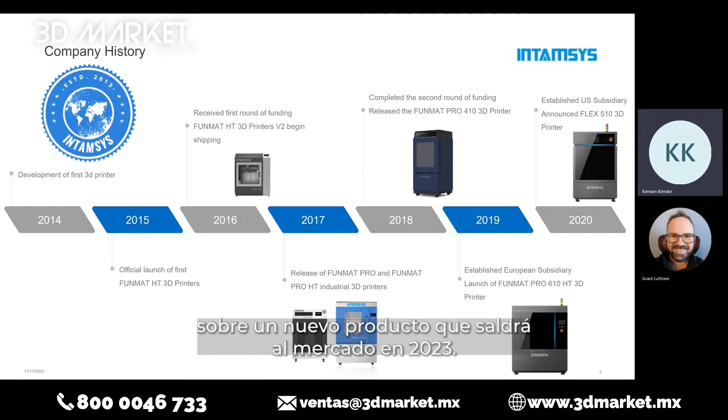When we look at not only the logos, but really the industries that we represent, we really have a focus within aerospace defense, automotive, general manufacturing, and the education market. It really comes down to the array of materials. As we mentioned, we focus not only on engineering grade, but getting into some of the high performing materials allows for applications into several of these industries.

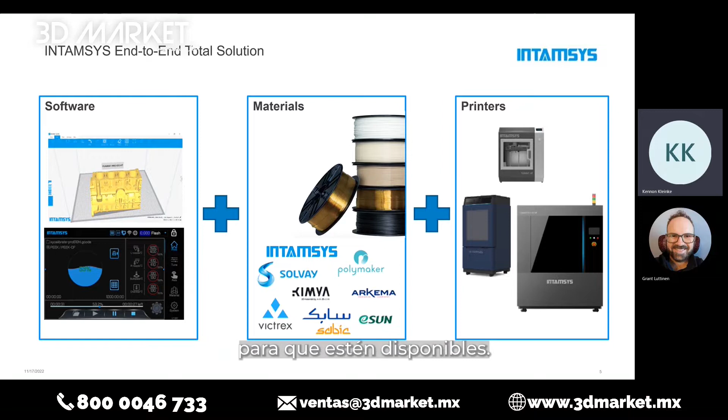When we look at the INTAMSYS capabilities, the technology, and the software that drives everything, it's important to represent that we are an open material and open software platform. We work with several material manufacturers to not only create or define some of our core materials, but that's a continuous development, and we work with these partners to introduce new market materials. When we look at the software, we do have INTAMSYS driven software, which we define as INTAMSuite. This is really an open source, ease of use software that allows your team to have complete control of the parameters needed to drive your application.

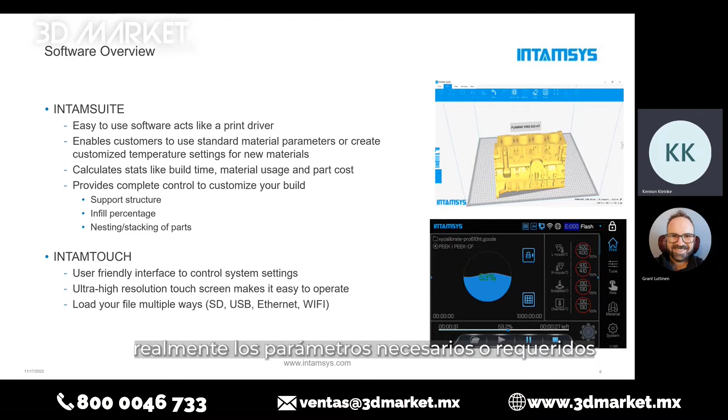When we look at some of the material manufacturers, we partner with some of the top quality filament manufacturers on the market. We have validated and have an INTAMSYS brand of materials that we supply. But if there's third-party or other material options you're looking for specific to your application, being an open source or open material platform, we give you full control to go to the market and find the best material for your application.

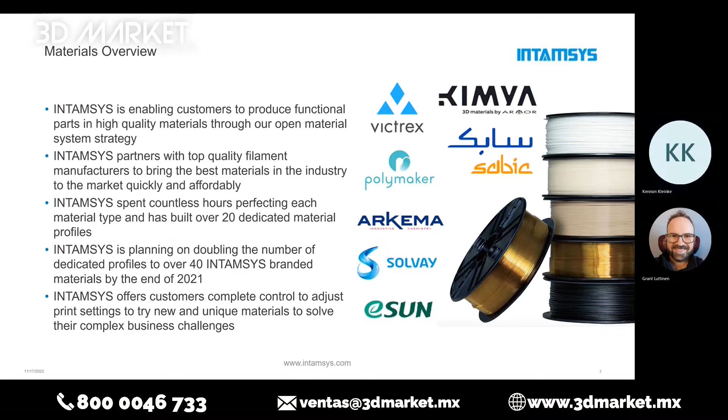Here's a look at the overall product line of where we are today. We started with the FunMat HT. We got into an intermediate industrial level, and then at the larger scale we go to a full industrial unit. We'll get into some specs and details here today in terms of the visual specs. In a little bit, Grant will give a detailed overview as we do a tour of our additive lab, and we'll get into more details inside the technology so you get a closer look.

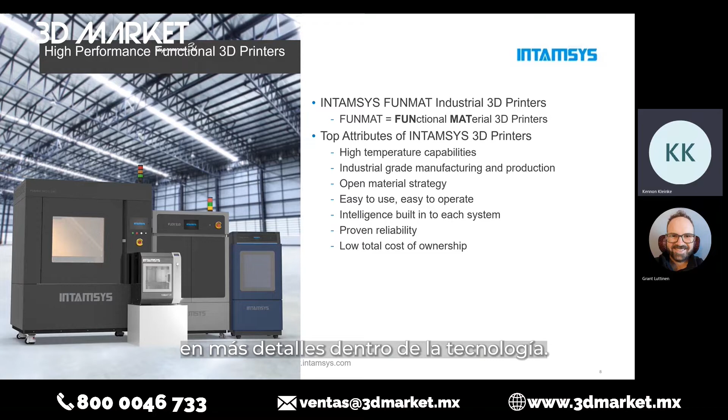When we start with the FunMat HT, we look at our desktop level. This is an industrial desktop printer. As you'll see with the chamber capabilities of up to 90 Celsius, that gives us the capabilities to start working into the high performing materials. As you will see, we have the capabilities of doing PEEK, PEKK, as well as some of the carbon-filled, glass-filled PEEKs and additional materials.

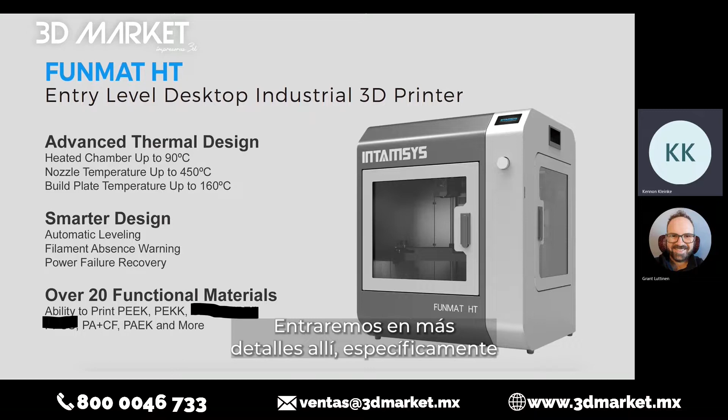We do have some of the materials crossed out. We were attempting, or at one point we were running Ultem, but we really look at that full industrial 610 unit for that. We'll get into more details there specifically to the Ultem material portfolio.

This goes into just some of the more basic information regarding that FunMat HT. We will have these documents available for PDF within this webinar download, so look to the sidebar for that information and you can obtain each of these documents for the FunMat HT, the 410, as well as the 610.

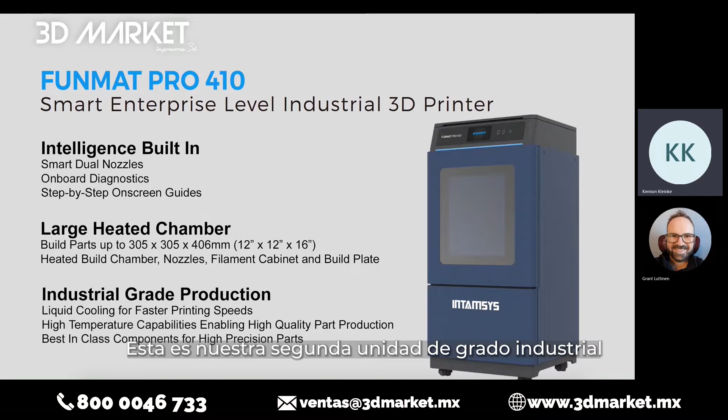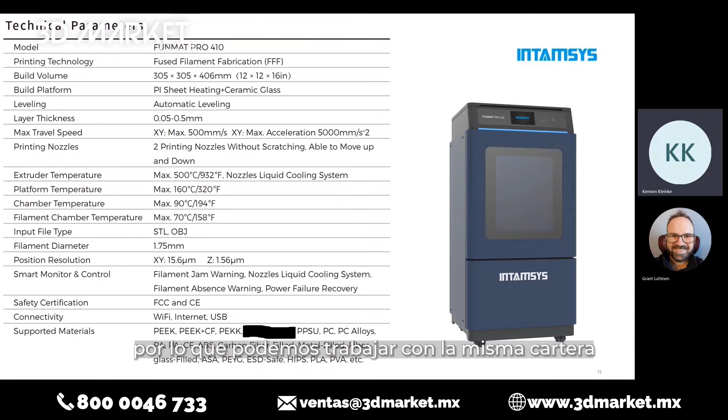This is our second, really our lower level industrial grade unit. This is a dual extruding printer, so that gives you the ability to work with that main filament as well as a secondary support material. You have a little bit larger build volume with this, an included material chamber, and we'll get into more details on the capabilities with the 410 machine. Again, this is up to a 90 C chamber temperature, so we can work with the same material portfolio as the FunMat HT, but we also have the availability to bring in support material, or work with a dual material application if required.

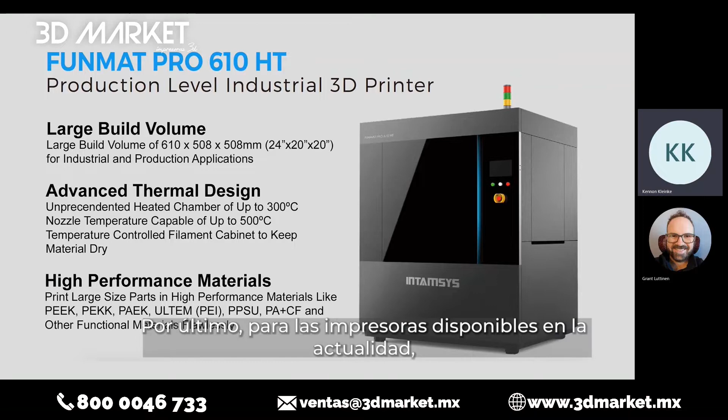Lastly, for the available printers today, we have the FunMat Pro 610. This is a full industrial grade unit.

Not only will it do the engineering grade materials, the high performing materials like PEEK, but as mentioned, we can do ULTEM 9085 as well as ULTEM 1010 and PPSU materials.

This is a much larger unit in terms of not only the build volume, but the size of the machine, and the capabilities of the machine.

Really with the ULTEM and the PPSU materials, as you'll see, this machine has an up to 300 C chamber environment. This allows the application to print not only the materials of ULTEM, but with the build volume and scale, we can do a 24 by 20 by 20 application.

So this gives you not only the ability to look at some of the highest grade engineering materials, but we can really do things on a larger scale as well.

So that's going to finalize a basic coverage of the technology and INTAMSYS. I think what we'll do now is get into a tour of our facility and give you a live look at what we have available, a better look at the machines, and give you a closer understanding. If you have questions, use the chat. We'll address questions throughout this, or maybe at the end as we take questions in as well.

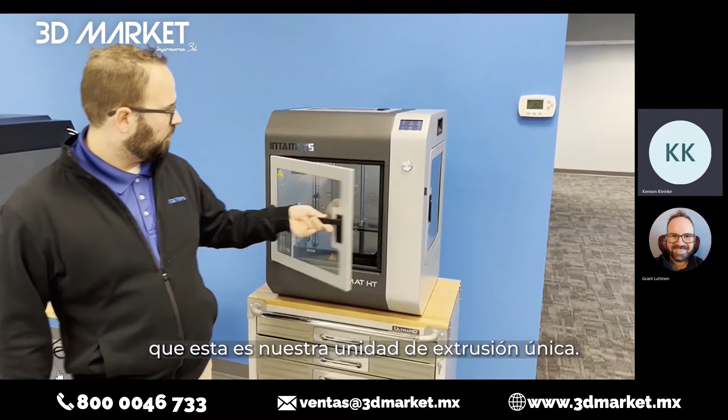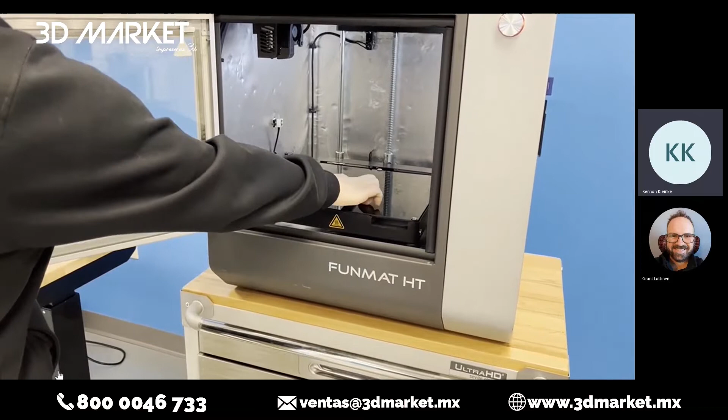So first here, you'll see our FunMat HT. Like Ken was saying, this is our single extruder unit. It features a ceramic glass build plate, 10 by 10 by 10 build volume. You'll see the heated build chamber with dual heaters and fans there.

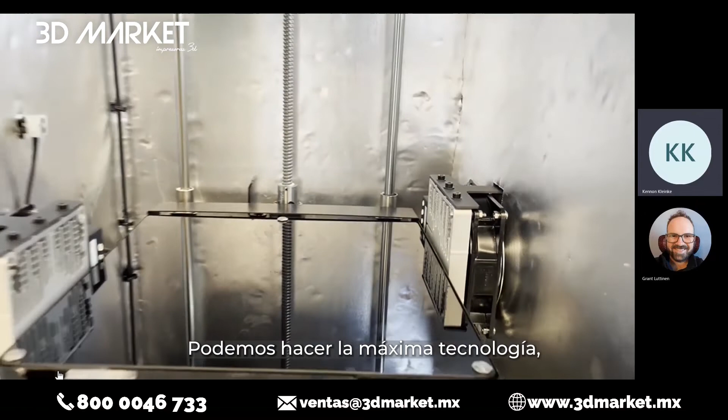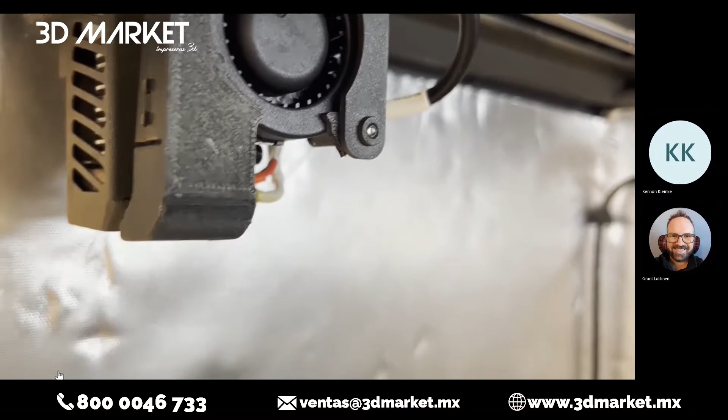Here's a quick look at our extruder, high power cooling fans, well insulated design. And for an entry level unit, getting access to these high performance materials, this is kind of second to none entry level.

Moving on, we'll go to a sneak peek of our Pro 310. This is our new desktop launching Q2 2023.

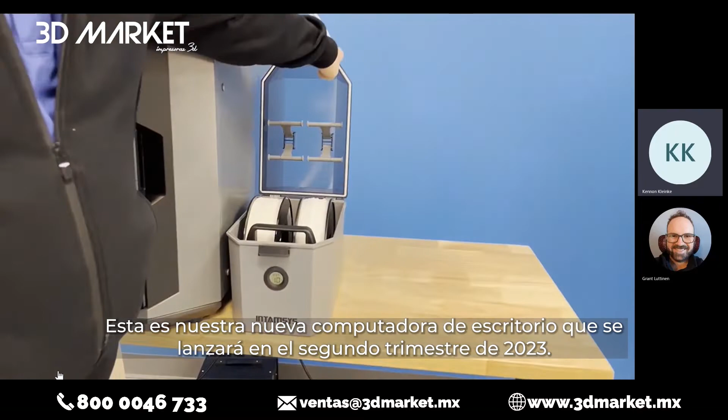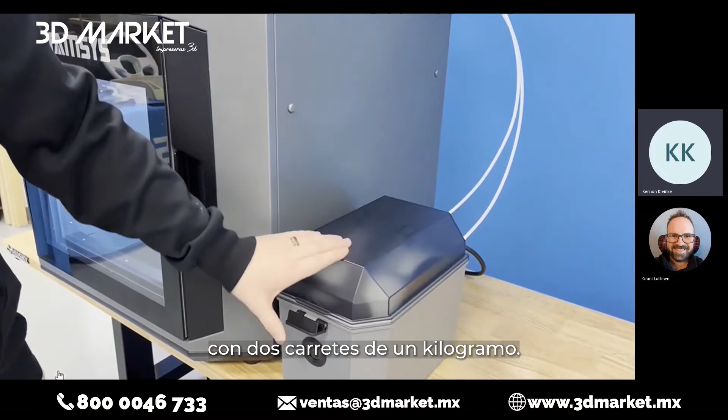Here we have a filament chamber with a molecular sieve. This is a desiccant filled chamber that holds two 1 kilogram spools. This keeps your material dry for up to 2 weeks.

In the chamber here, you'll see we have a flexible build plate. This allows for large parts to be removed very easily.

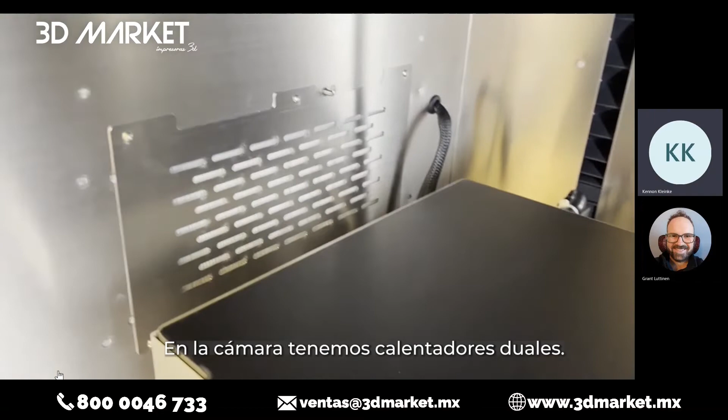In the chamber, we have dual heaters. Each side of these heaters is actually going through a HEPA and carbon filter. What that means is this machine can sit right next to you on the desk and you can use it just fine.

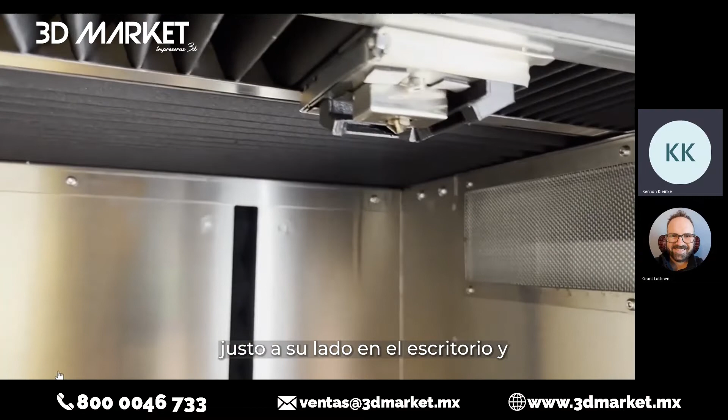What you're looking at right now is actually called an IDEX machine. IDEX stands for Independent Dual Extruder. So each one of those extruders can move independently in copy mode, mirror mode, or regular dual extrusion mode.

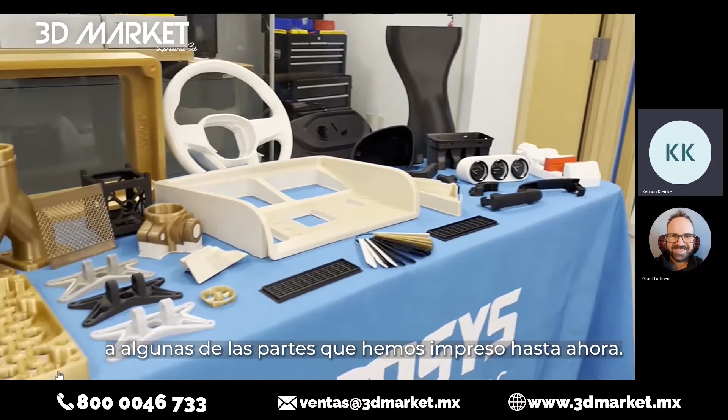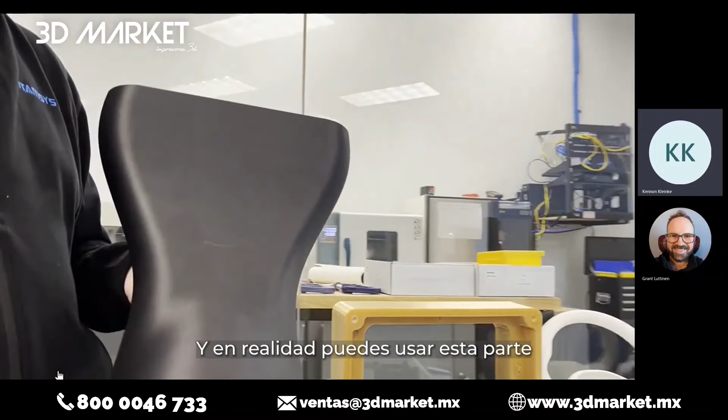Moving on, we're going to take a look at a few of the parts that we've printed so far. We're going to start out with this beautiful PEEK carbon fiber part that we printed on our Pro 610. PEEK carbon fiber has a tensile strength similar to aluminum, and you can actually use this part up to 315 degrees Celsius. This is an air manifold part, super awesome application.

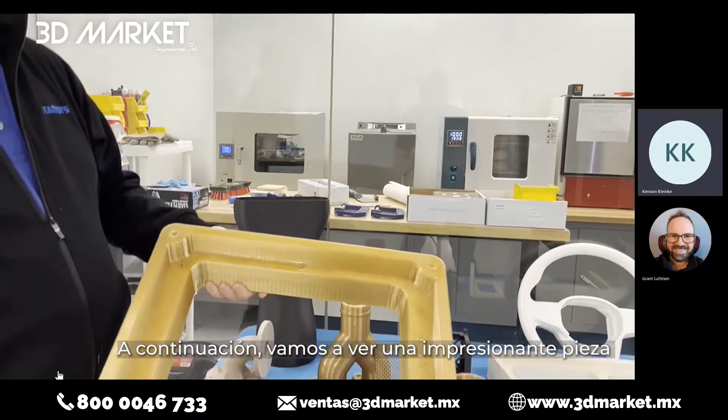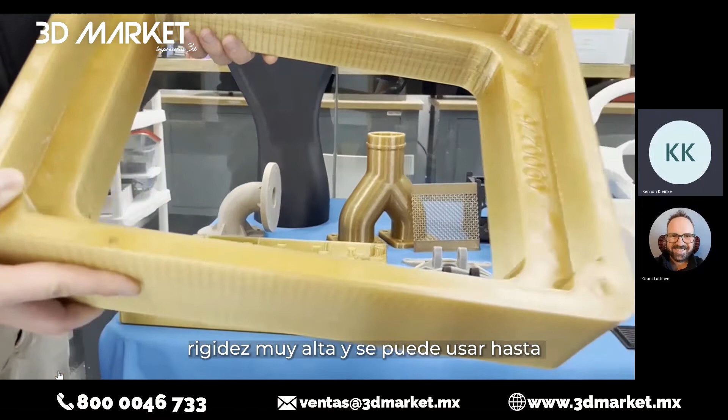Next, we're going to look at an ULTEM 1010 part, again printed on our Pro 610. This is a mold slip. Because ULTEM 1010 has a very high stiffness and can be used up to 200 degrees Celsius, you can use it for low temperature molding applications.

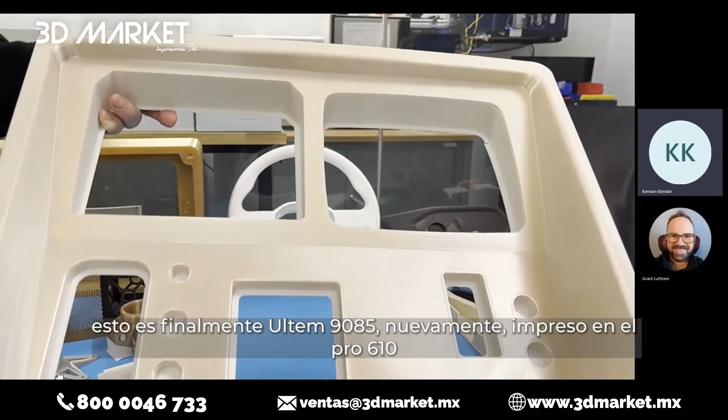Moving on to our next part, this is Ultem 9085, again printed on the Pro 610. This is a railway control panel. For applications in railway, Ultem is really important because of a low flame, smoke, and toxicity rating.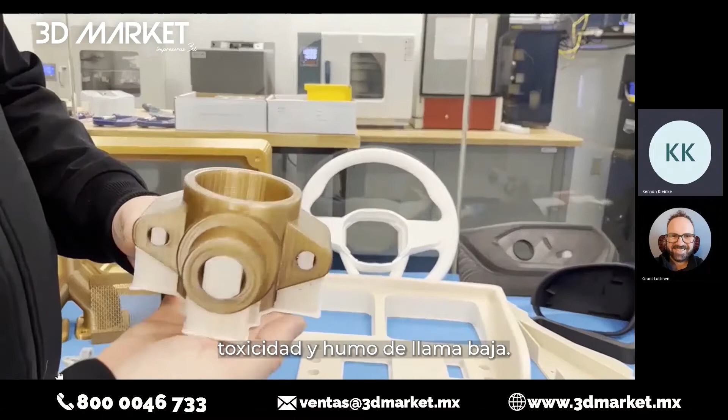This part is PAEK. PAEK is a PEEK replacement part that has near isotropic properties, meaning we have almost as good tensile strength in Z as we do in X and Y.

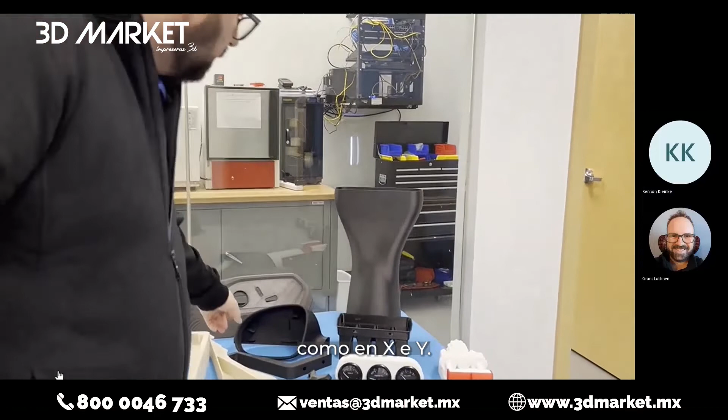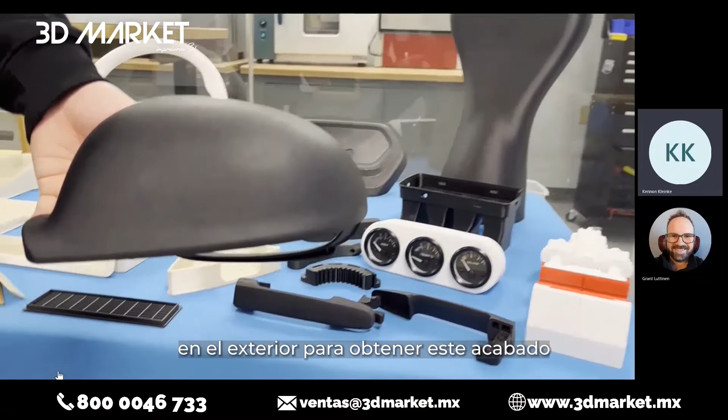Moving on, this is a nylon 12 carbon fiber part printed on the Pro 410. We media blasted the outside to get this surface finish, but it prints gorgeous from the printer.

This is a gauge housing that we printed out of ASA on the Pro 410. The cavity inside this gets filled with support material, so it really wouldn't be able to be printed on a single extruder.

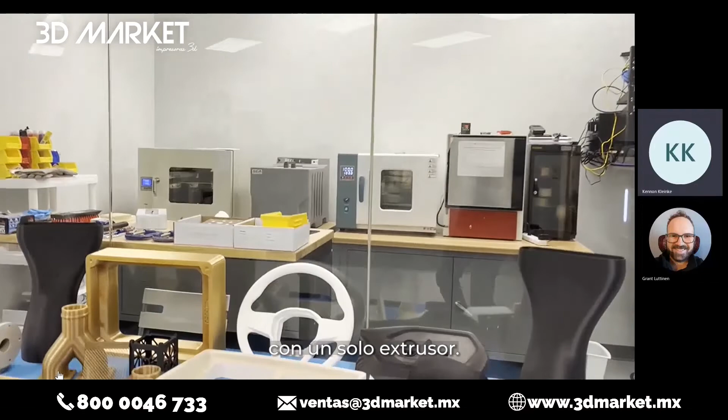These are just a few of the applications that we've taken on. With INTAMSYS equipment, you can really tackle whatever application you have for it.

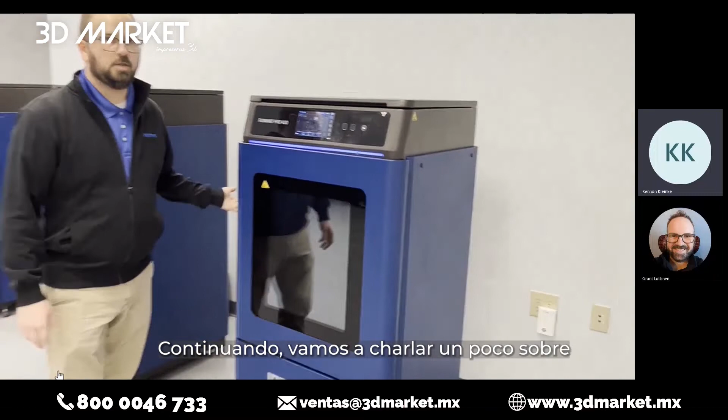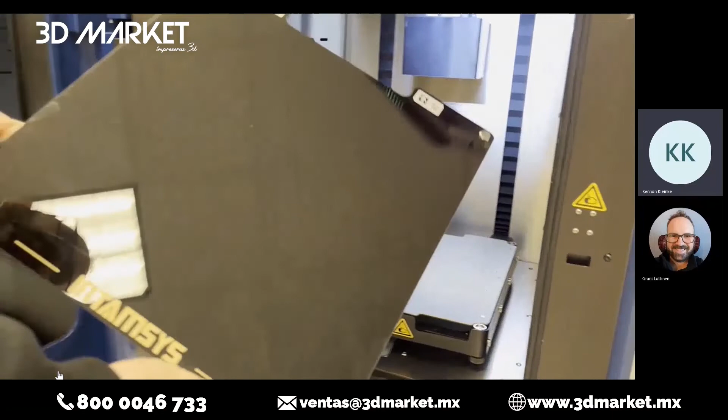Moving on, we're going to chat a little bit about our Pro 410. Our Pro 410 is a dual extruder. We have a ceramic glass build plate, a 90C heated chamber, and a 160C heated build plate. This is really our workhorse machine these days—we print a whole bunch of PEEK carbon fiber in these machines.

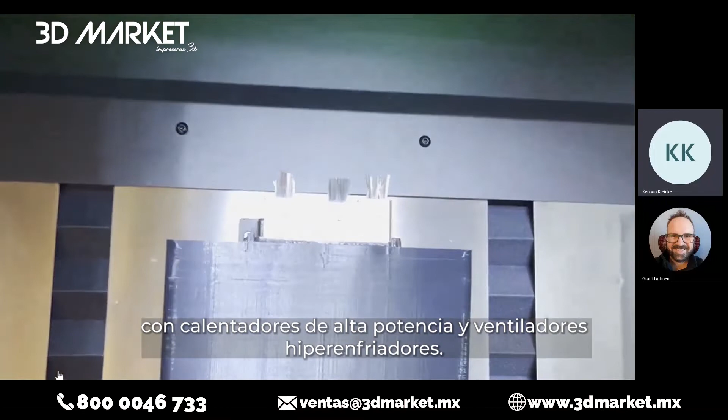There's the dual extruder with high-powered heaters, high-powered cooling fans, and then these are nozzle brushes and wipers with a purge bucket to keep your parts clean and coming out pretty from the get-go.

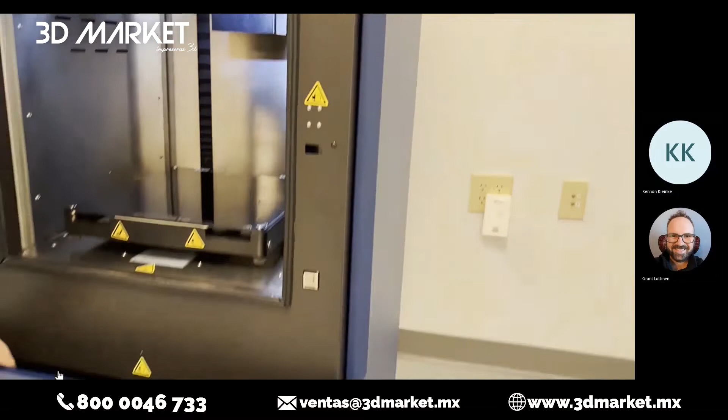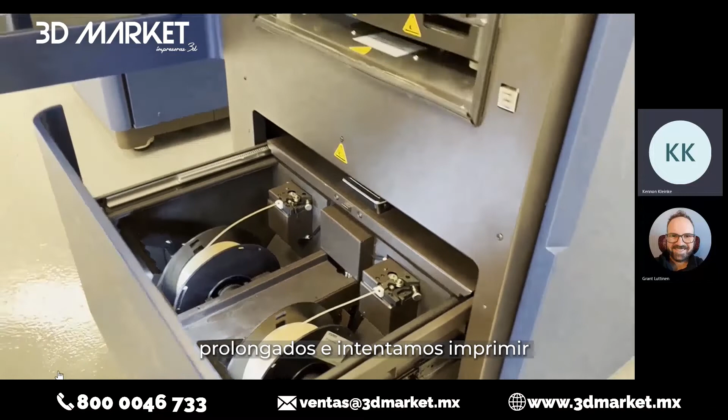Down below, you'll see our temperature and humidity controlled filament drawer, where we're keeping our material dry for extended periods of time to print larger parts. This is super important when we're printing materials like PEEK, PEKK, PEEK CF, as well as nylons.

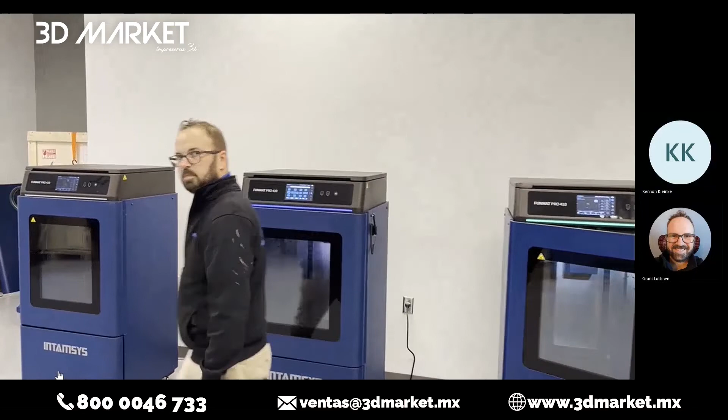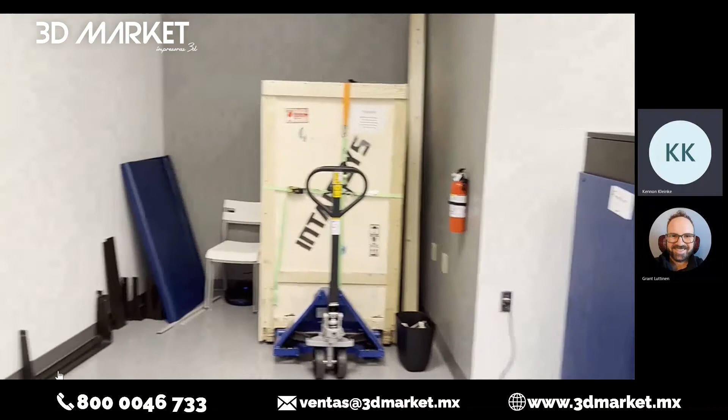Moving on here, you'll see some additional equipment that we have. So there's a 410 in a crate, but also we have some workspace for ongoing projects we're working on. An additional 410 for training there, and then we're moving on to our 610.

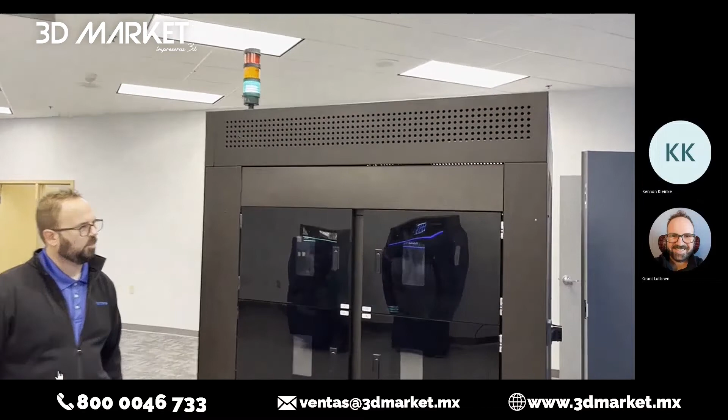Our 610 here is a 4-bay system. This actually does allow us to do an automatic changeover, so when a spool runs out, it'll unload one spool, load the next spool, and resume the print without any human intervention. Super important when you're running jobs over the weekend or long jobs overnight, or even just finishing up the last bit of that spool.

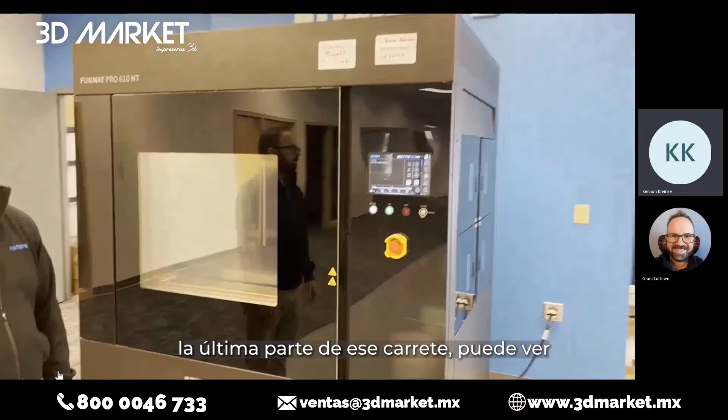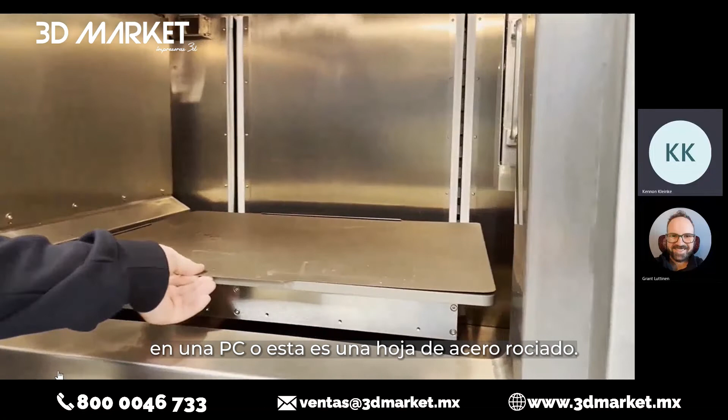So you can see this is a very large machine. Inside, we're printing on a PC, or this is a sprayed steel sheet. This is for our high temperature applications like Ultem 9085. You'll see an advanced thermal design in here, as well as the same dual extruder that we're using on the Pro 610 or the Pro 410.

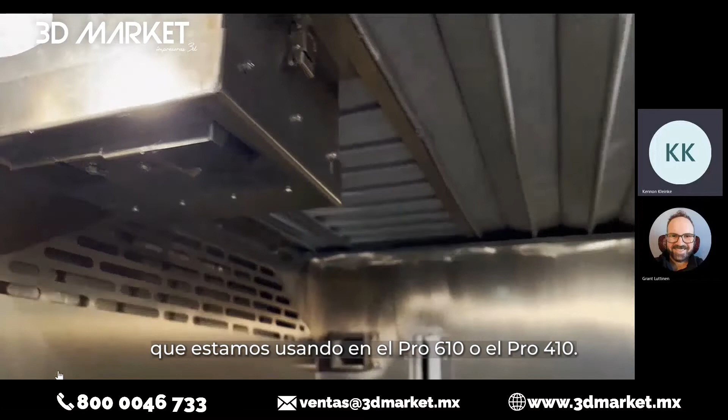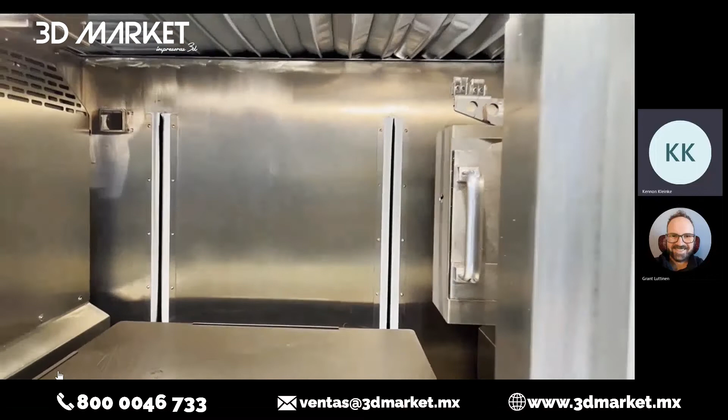We have thermal bellows to separate all of the electrical components from the rest of the printer. Again, we have tip wipes and brushes with a purge bucket to keep your parts clean for the long haul.

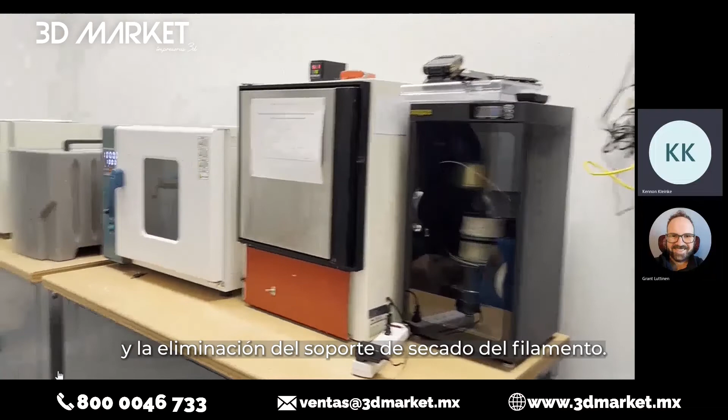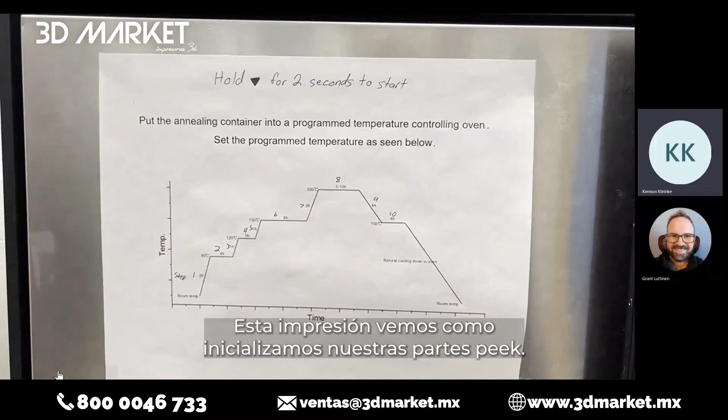Moving on here, we'll take a look at our post-processing lab. This is where we do our annealing, our filament drying, and support removal. This first oven you see here is actually a custom annealing oven that we built. It follows a curve—this is how we anneal our PEEK parts and our PEKK parts. This is a filament dryer. One of the banes of FDM's existence is moisture in material, so it's super important to have something to dry material.

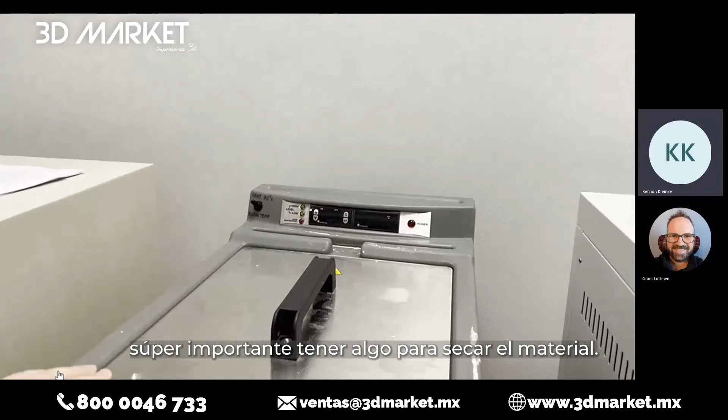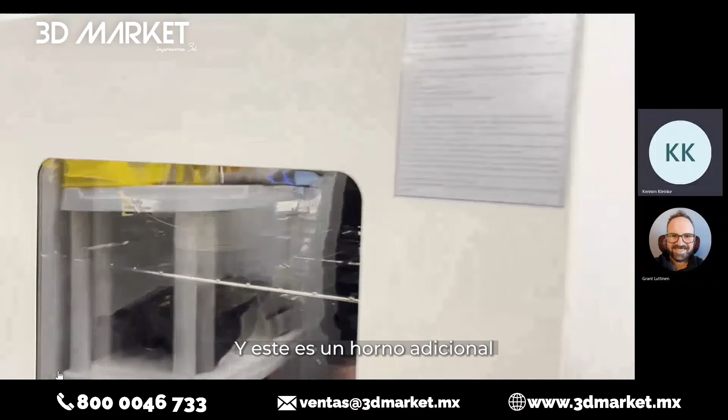This is a support removal tank. Some of our support removal is water soluble—dunk it in that tank and it dissolves right away. And this is an additional filament drying oven and annealing oven. You don't need all of this equipment, but some of it certainly helps, especially the filament drying oven.

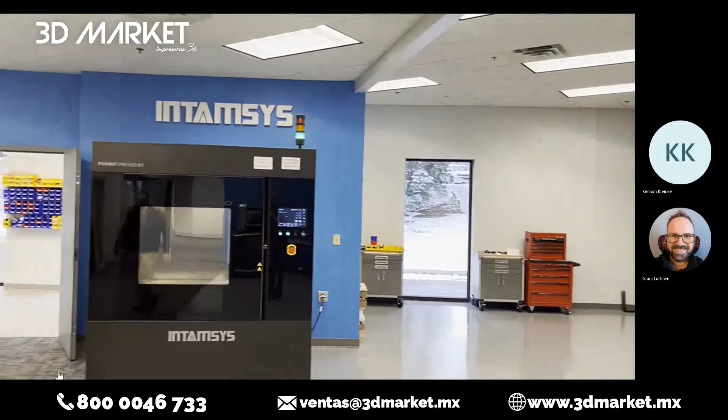Last but not least, we'll take a quick sneak peek at our inventory and availability in the Americas office. We have our entire materials portfolio in stock here—that's model and support materials. And then moving on, we'll see our spare parts inventory for the HT, the 410, and the 610. So we really are prepared and set up to support anyone with any of their needs directly from the Americas.

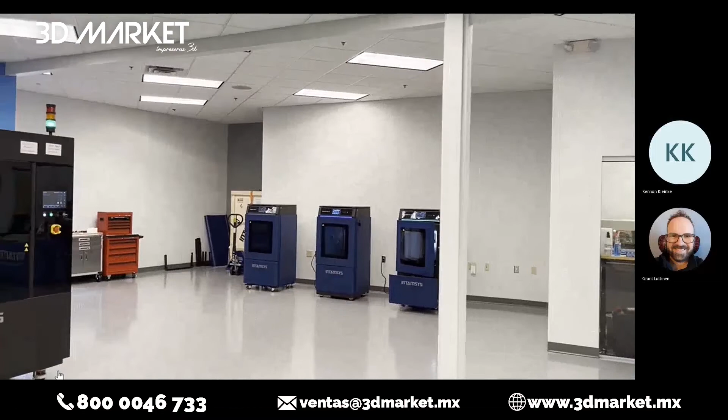All right, hopefully you guys enjoyed the tour of our facility.